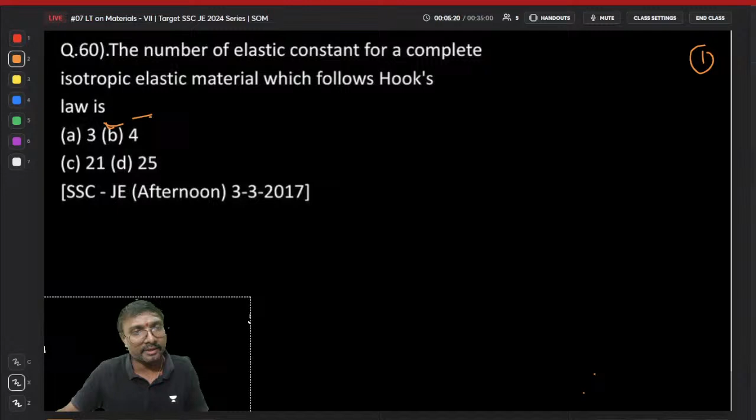Rubber we have selected, right? I have given the values also for this, na? Now this one, yeah, this one is also over. Number of elastic constants for a complete isotropic material, right? That fourth one we have done. Yes, this is also over, right? Now which one? 61, it is not over, na? So 61 is not over, right?

Got it? Arey yaar, this cursor is not moving easily. Why? I don't understand. It is like somebody hacked my system. It is not moving. Right, arey yaar, why? What happened to this?

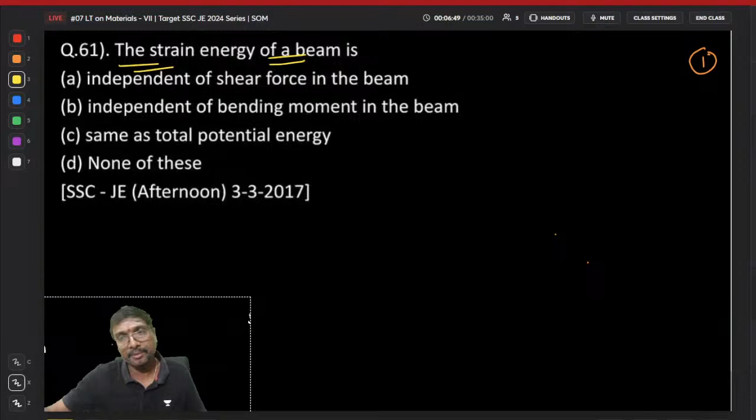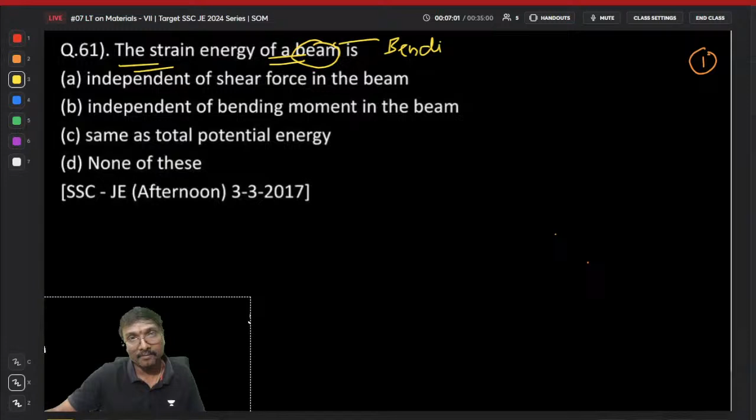The strain energy of a beam is, right? What is the strain energy of a beam? If you just observe, beam means it is a bending member, or it is which member? Tell me. Beam is nothing but mainly a bending member only, na? Beam is mainly a bending member, you can say, right?

Now tell me, is it depending upon the shear force or independent of the shear force? The strain energy for this bending member beam is given by integral of Mx square dx divided by which one? This EI, na? Mx square dx divided by EI, if you just read. Got it? Or 2EI or EI, which one it is? 2EI, na?

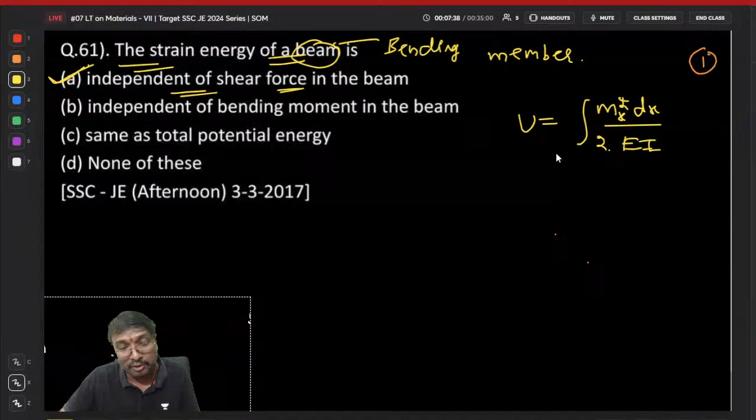That is your bending member. Bending member means bending moment should be considered, if you just observe, right? Now next one, 62nd question, if you just consider, right? What is it you can say? Select the answer for the 62nd question, everyone.

62nd question, somebody answer. Pulkit answered correctly.

Yeah. So here, what is that you can say? In a composite system subjected to a temperature rise, right? So what is the composite system? I will explain, don't worry, right? Did I leave anything without explanation? No need to ask separately, okay? In a composite system subjected to this temperature rise, right?

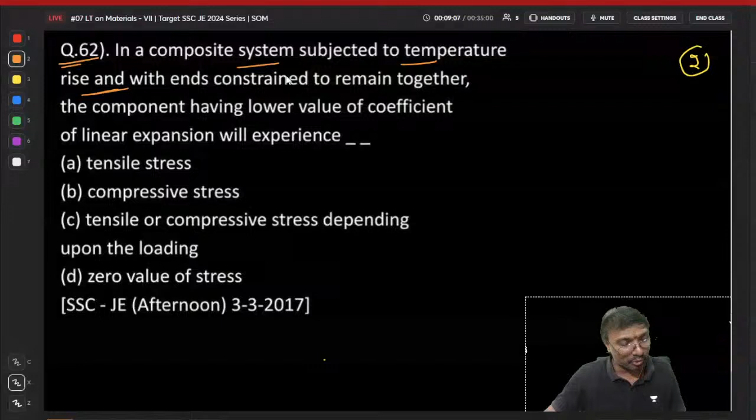Composite means only one is there, or two members are there in the composite section? Composite section means how many members will be there? More than one member will be there, then it is called your composite section, na? So these are your two sections, right? More than one member is there. You know? So now one is which one?

And with the ends constrained to remain together, right? Ends constrained means these ends are connected together, na? Ends are connected together. The component having the lower value of the coefficient of linear expansion will experience, right? So let us say this one is having a higher alpha. This one, let us say, is having lesser alpha.

Now what happens? Tell me if you just observe. Temperature rise is there, right? Whenever this temperature rise is there, subjected to temperature rise with ends constrained. You can take the bottom one, you can take the top one. It is not mentioned. One we are taking higher alpha, one we are taking lesser alpha, right?

You can take the upper material with lower alpha and the lower material with higher alpha. There is no issue, right? Just for example we have to take it, right? So that is why we are taking it. Now tell me,

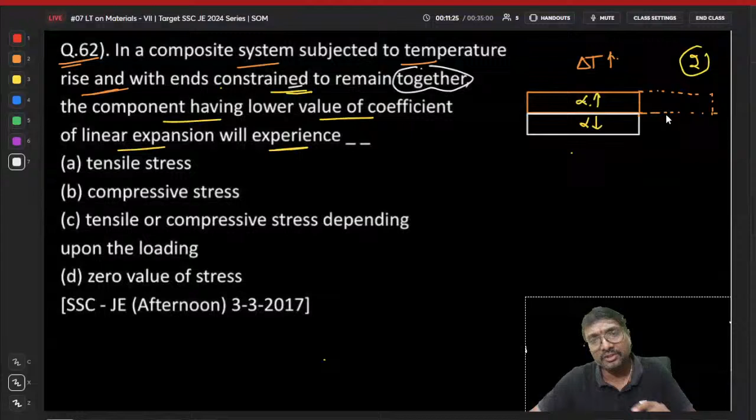It will be extending up to this point under free conditions. When delta T temperature increases, it will be expanding up to this point under free condition. Alpha is lesser means it can be expanding only up to this point because of this lesser alpha. So these are your free expansions, up to this point, is that clear?

These points are clear, everyone? These points are clear, right?

Now, but what happens? Both are acting together, na? Both are acting together, if you just observe, when both are acting together, they will be expanding to the same extent.

Strain compatibility, right? When both are together, what will happen? Will one be subjected to higher deformation and one to lesser deformation? That kind of condition will not happen. Together means strain compatibility will be there.

Together means what condition will be there? Together means it is your strain compatibility you are having. So whenever there is strain compatibility, both together will be expanding only up to a certain point.

So what is this one? This is your final expansion of these two. Is it clear now, every point? This is the final expansion of these two, all of you. Can you say this is the final expansion of these two?

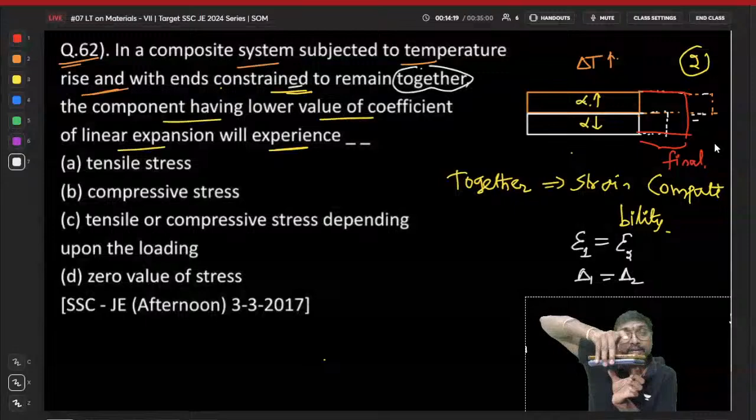So the higher alpha material is expanding more, the lesser alpha material is expanding less, right? But what is mentioned? Ends are constrained to remain together. They are held together. Remaining together means there is bonding, means composite behavior will compulsorily come, and this strain compatibility condition must be existing.

Whenever there is bonding, strain compatibility condition definitely comes into picture, isn't it? Got it?

So now both together will be expanding only up to this point, this red color one. Now tell me, it is expanding to which one? Yeah, they will try to behave like a single member. Yes, absolutely correct, right?

So now whenever they are expanding like this, the higher alpha material is expanding to a lesser value than the original. So that means it is under compression effect. It is under this compression effect. So the higher alpha material is under which stress, you can say? This is under compression effect, that is the compressive stress it will be having.

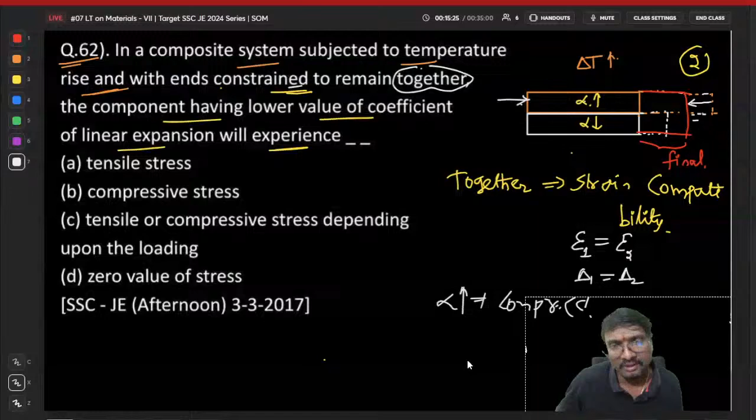Okay, yeah, it is getting stuck. I don't know what is the reason. Next, see my writing how it comes. Stuck, it is coming like that.

Now the lesser alpha material, what will happen to it? It is expanding to a value more than its capacity, more than its precondition. When will it happen? Because if it is under tension only, this will happen, that is under tension, right?

Understood now? So lesser alpha material is under tension, higher alpha material is under compression, right? So which one is the correct answer now? Lower coefficient of thermal expansion material will be having tensile stress, right?

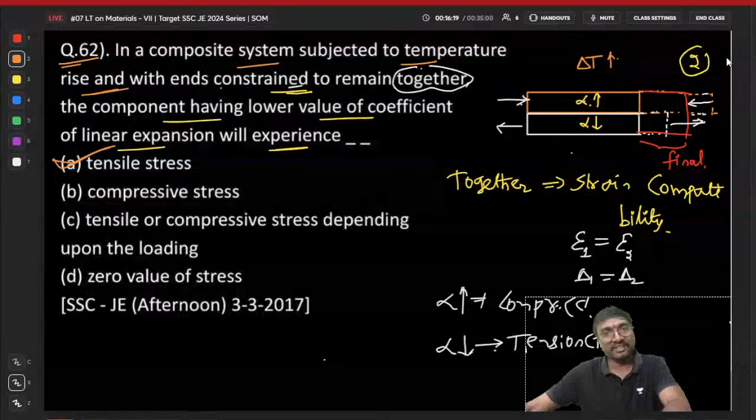Is that clear everyone? Shall we go on to the next? PC needs some rest. Okay, shall I go to the 63rd question?

Yeah, Aravind answered correctly. What about the others?

Right. Okay. So here we're just observing, right? What is that we have to go for? What is the question given? You can say.

Right, no poll, it is not started. Oh yeah, I thought poll is running already. Okay, one second, 30 seconds time only. I'll do it now, otherwise...

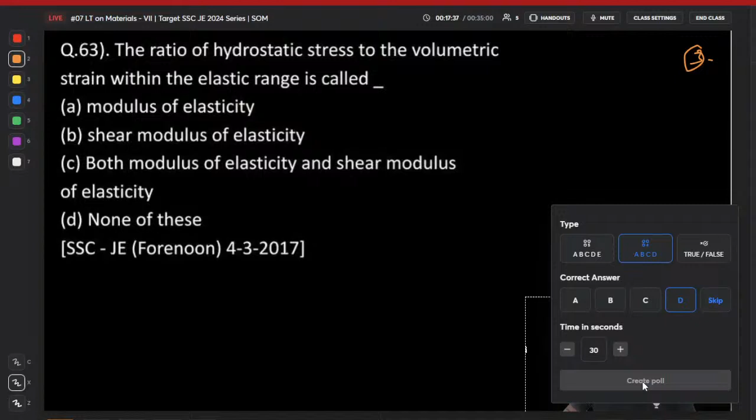Yeah, Aravind, correct. Pawan, Shruti, Pulkit answered correctly.

Right, so here, laptop keep it in AC room. AC is not there, okay, in our house. Right, we thought of taking now actually.

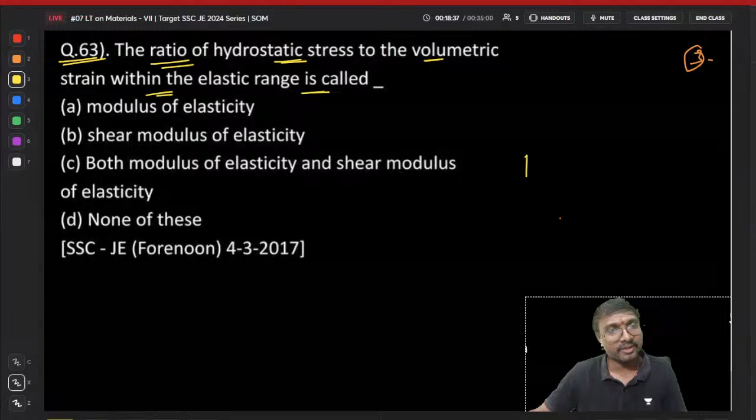The ratio of hydrostatic stress to the volumetric strain within the elastic range is called as, right? Hydrostatic stress rate - what is the hydrostatic stress? You can say that uniform hydrostatic stress means it is the same stress in every direction, divided by this volumetric strain, right? What is that?

That is your bulk modulus. It is not the elastic modulus, right? What is that elastic modulus? Normal stress to normal strain. Shear modulus is nothing but your shear stress by shear strain. Both elastic and shear modulus - is it so? No, nothing like that. It is not like that.

So which one is correct now? Bulk modulus is the correct one or not, everyone, right? Bulk modulus is the correct one, you can say just that. Bulk modulus only will be the correct one, you can say. Got it?

Right, one second, just some questions are left actually here. One sec.

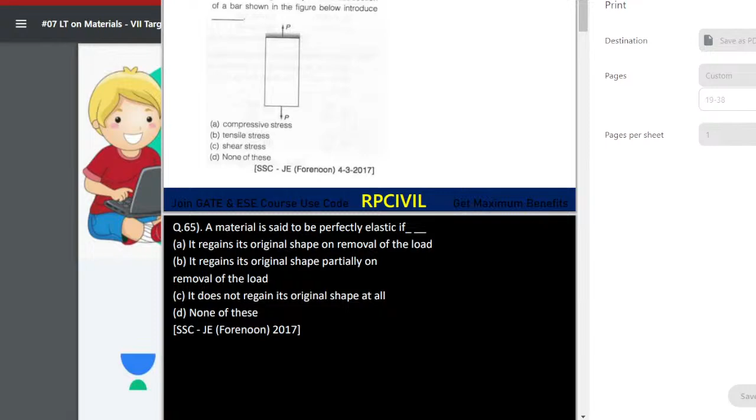Right, I'm just uploading these questions. Right, 63 questions are over. Now we'll be going from which one? This is 64th question onwards, right? 64th question onwards.

Yeah, you have seen that question. Very good. One sec.

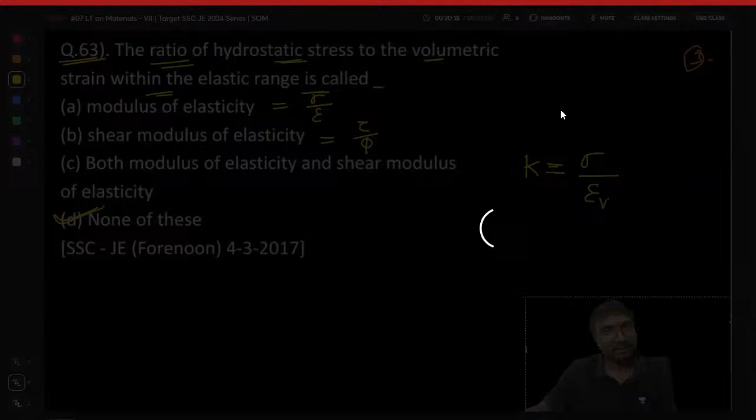This is 64th question, you can say. So shall I start the poll for the 64th question, right? Select the answer of you. 30 seconds time I am giving.

I told you now 90 questions are there. We are doing the 64th question, right? Just 1 or 2 classes, it will be over. Okay, first chapter gets over, right? Next we'll be starting the SFD BMD because that is the most important chapter afterwards now. Or principal stresses shall I go for?

First, what is that you can say? Simple stresses and strains, principal stresses and strains, and what is that you can say? Next one is deflections, SFD BMD, right? These 4 chapters are very most important topics for any examination's point of view.

You want me to take principal stresses and strains or SFD BMD, which one? Or my wish is to take principal stresses and strains.

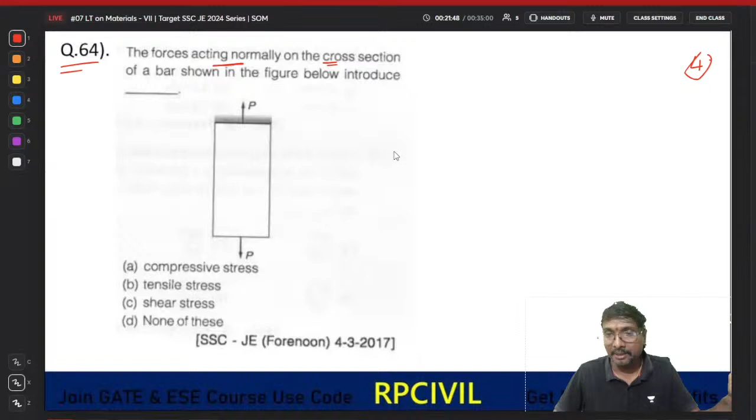Is not BMD especially we should know for getting some of the deflections, isn't it? Moment area method, right, the moment area theorem, right? Conjugate beam method, if you try to use now, SFD BMD we should have idea, right? For that purpose, after SFD BMD only we should go for these deflections, right? Before that we don't go. Okay, I'll go in my own way, don't worry.

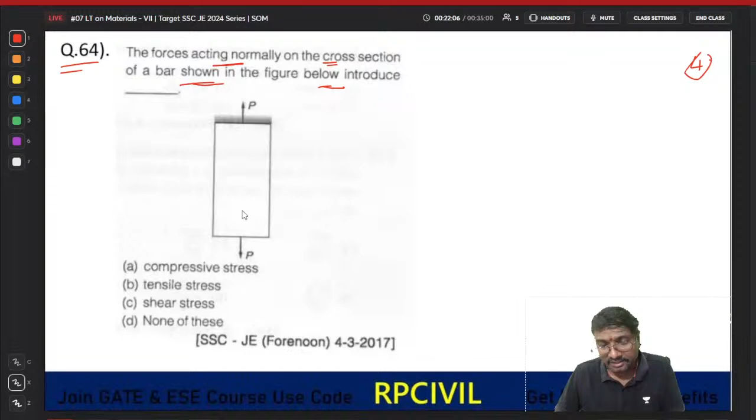Right, the forces acting normally on the cross section of a bar shown in the figure below introduces, right? What is it you can say? So external load is your tensile load, na? This is a tensile load, will be creating which one? This is a tensile stress only, na? Yes or no? Next, the 65th question, right?

Try to select the answer of you. 30 seconds time I am giving. External force is your tensile force, therefore the stresses comes to be which forces? If you just observe, those are your tensile forces only, isn't it?

Right? Pavan, Shruti, Pulkit answered correctly. So what is it you can say?

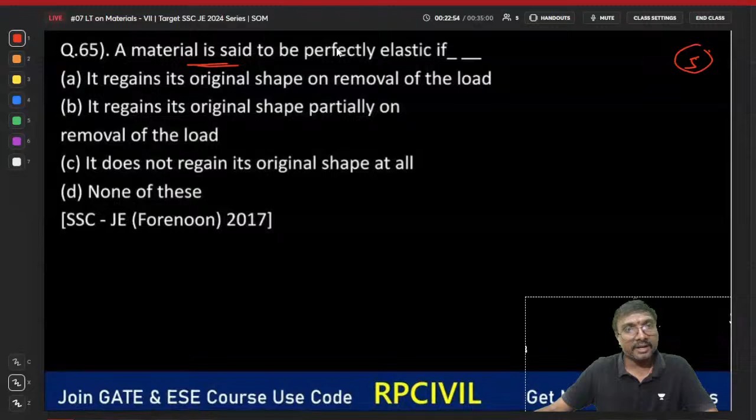A material is said to be perfectly elastic when it regains its original shape and size on the removal of the load. That is called perfectly elastic, isn't it?

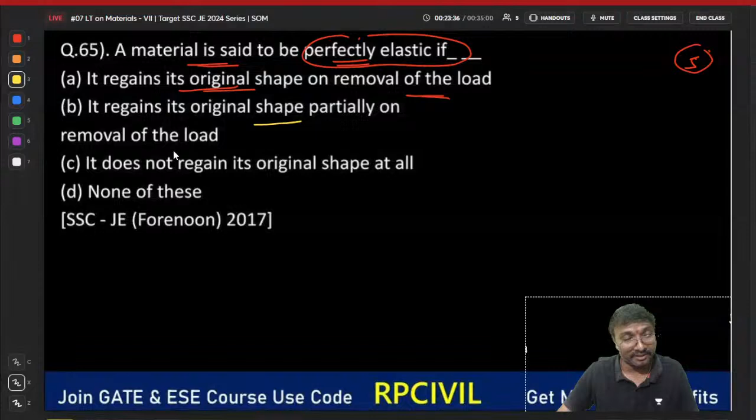It regains the original shape partially. When it regains it partially, can you call it perfectly elastic, or partially elastic? You call it partially elastic. Perfectly elastic you cannot call it, isn't it?

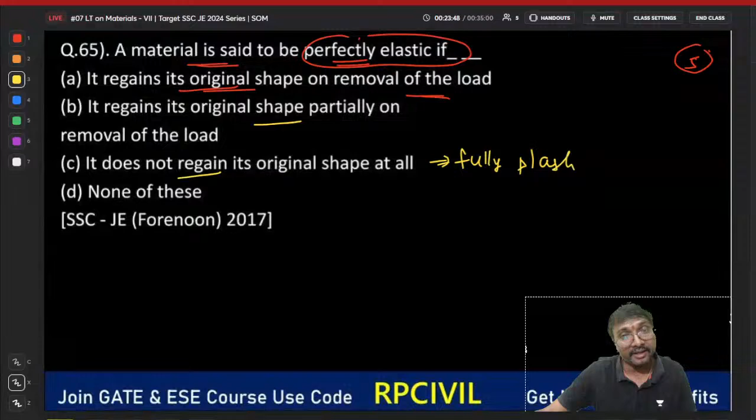It does not regain at all. So which one is this? This is fully plastic, right? Option C is fully plastic, it cannot regain at all. So perfectly elastic means the first option is the only correct answer, right?

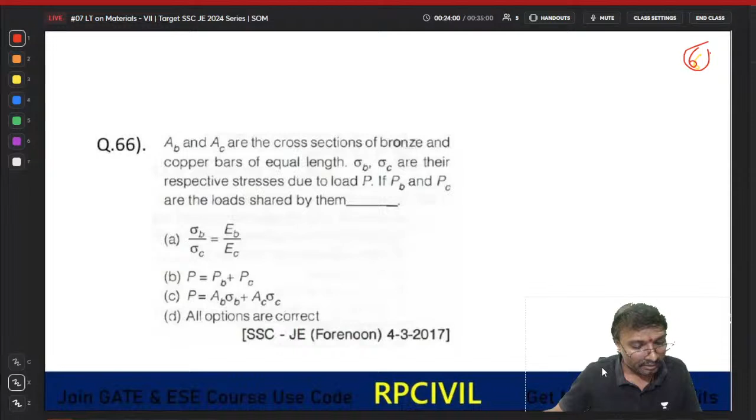So shall we move to the next one, the 66th question? Here, select your answer. I am giving 60 seconds time. Try to solve this, all of you now.

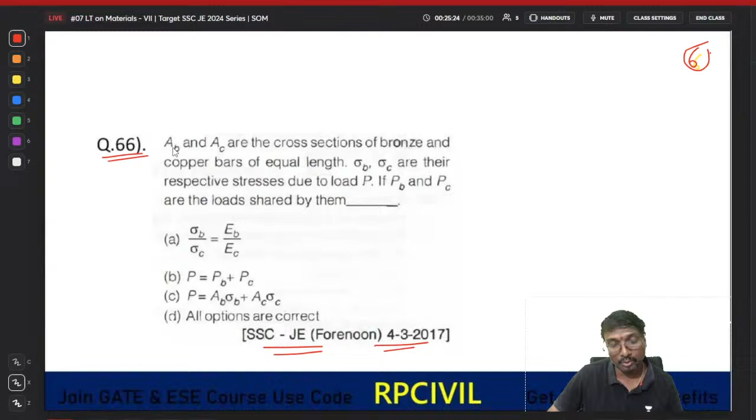AB and AC are the cross sections of bronze and copper bars having equal lengths. Tell me, are both having equal lengths or different lengths? Both are having equal lengths, right?

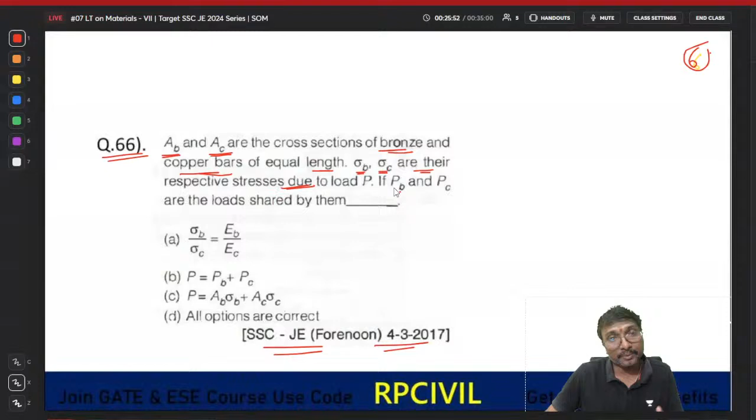Now sigma B and sigma C - what is it you can say? Sigma B and sigma C are their respective stresses due to load P applied on them. Individually, bronze has stress sigma B, copper has stress sigma C.

Now PB and PC are the loads shared by them. What is the relation between PB and PC? How can you get that relation if you just observe? Here both are having the same length.

So what can you say? Epsilon B will be equal to epsilon C, isn't it? This means the strain compatibility condition.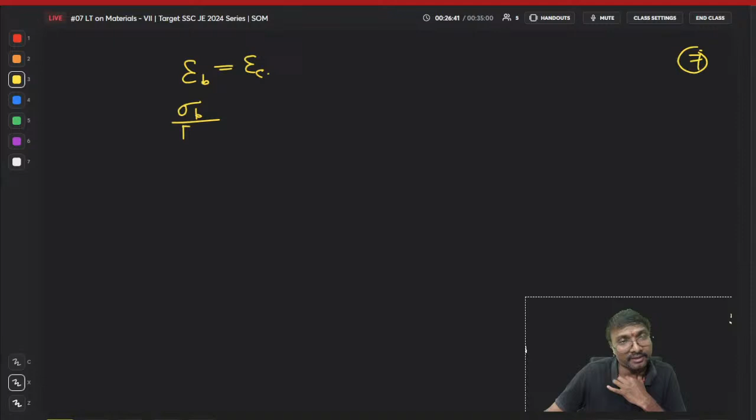And epsilon B is stress in the bronze divided by Young's modulus of bronze, equal to stress in the copper divided by Young's modulus of copper. Okay, like that we are having.

So this is a relation we should have, and what else? Sigma B by sigma C will be equal to Young's modulus of bronze divided by Young's modulus of copper. Can you take it like this?

Now what is the total load? Total load is shared by both - load taken by bronze plus load taken by copper. Now tell me which one is correct if you just consider.

The first one is correct, the second one is correct. So PB is nothing but AB into sigma B, this is correct, right? Which one is the correct answer now? All of the above is the correct answer.

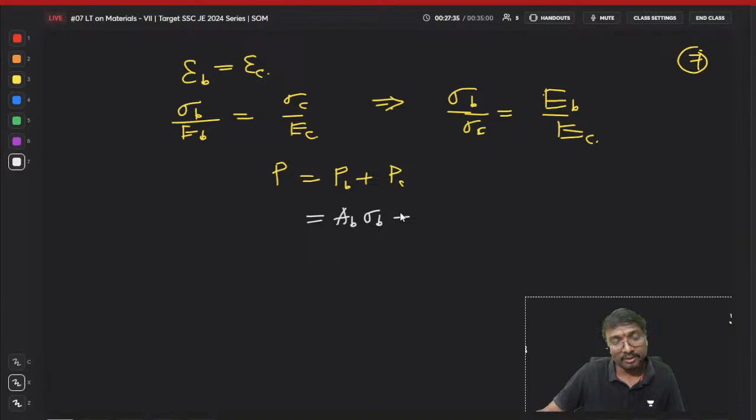So PB is area of cross section of bronze into stress in the bronze, plus PC, load taken by copper, is area of cross section of copper into stress taken by copper. Got it now, isn't it?

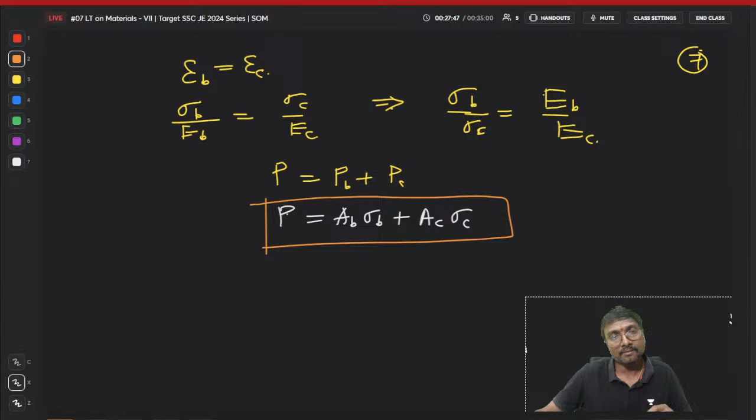Clear now, everyone? Shall I move on to the next? 67th question, shall we move on to?

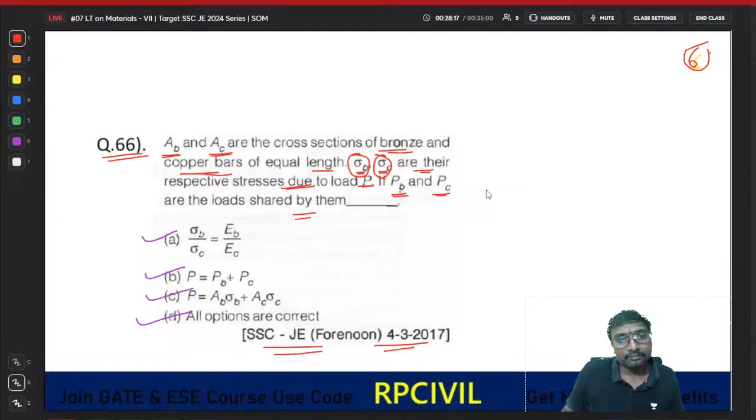Composite, it is mentioned, equal length are the respective sections, right? These are the loads shared by. So now, automatically, when a composite section is given, if no specific condition is mentioned, you have to consider they are following this composite behavior, right? Yes, no? Okay. They are following the composite behavior by default, we have to consider. Composite behavior is there means strain compatibility also must be there by default.

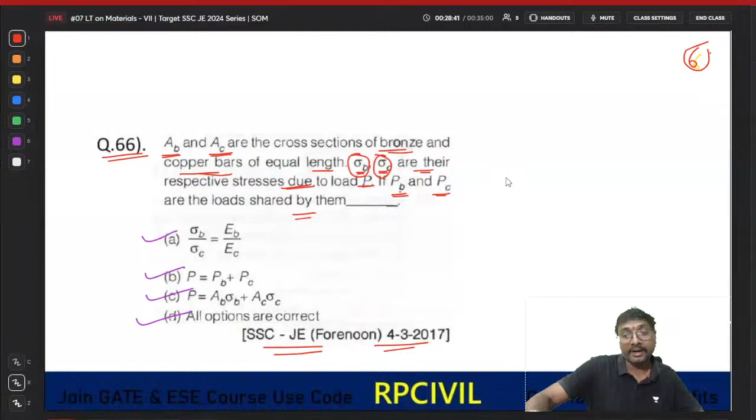If it is mentioned that they are behaving individually, then you don't consider that. Higher alpha material will be expanding more or contracting more. Lesser alpha material is expanding less or contracting less, right? That is what. Got it? 67th question, shall we go for? Select the answer, everyone.

Will get answered correctly. Arey yaar, more time I have given, extra time, unnecessary time. Okay, I'll end the poll. Anybody from YouTube? Nobody answering from YouTube?

The ratio of shear stress and shear strain of an elastic material. So what is that? Young's modulus is normal stress to normal strain. Rigidity modulus or which one? Rigidity modulus is C equal to N, or this is shear modulus, right? G equal to C equal to N equal to tau by phi.

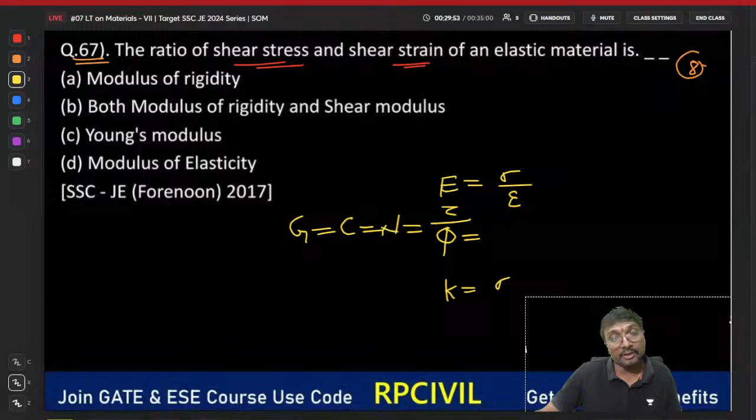And bulk modulus is equal to which one? This is normal stress by volumetric strain. So which one is correct? Both modulus of rigidity and shear modulus, right? We can call it with any name. Right. So shall we move to the next one, everyone?

So this 68th question, shall we go for it? So we'll start the poll. You observe A, B, C, D properly and select the answer. This is your C and this is your B. Don't take that 5 millimeter as B. Take that 5 millimeter as C. You observe and select the answer.

You are not listening. Who is that cute fellow? Not listening to me and answering one after another. I was telling that already. You observe B, C properly and select the answer. So you have to be careful. Don't be in a hurry always. Okay? Pulkit only answered correctly.

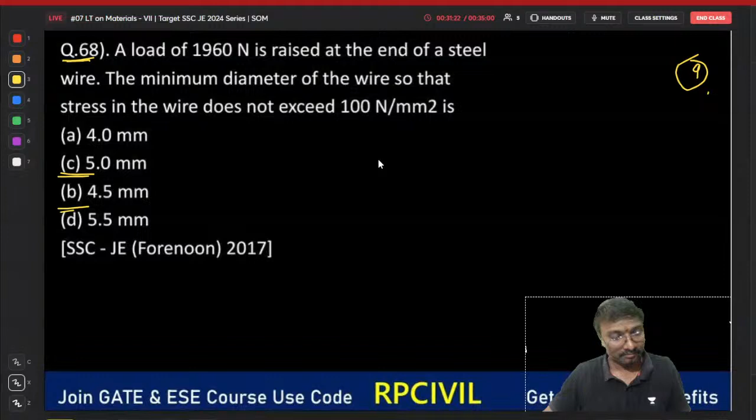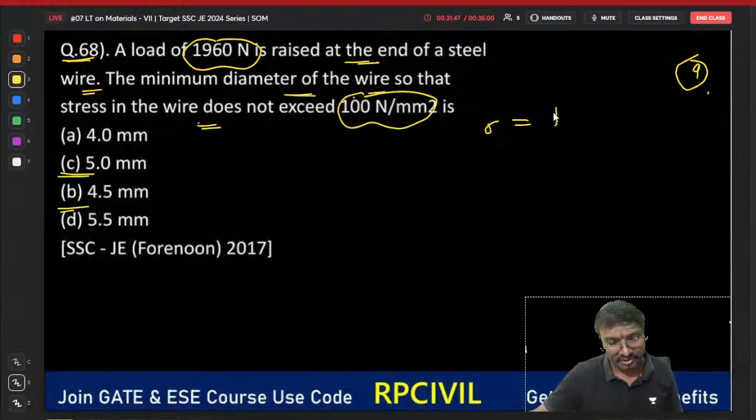Right. So a load of 1960 newtons is raised at the end of a steel wire. The minimum diameter of this wire, so that the stress in the wire does not exceed 100 newtons per millimeter square. So stress is nothing but load by area, right? Diameter is mentioned; you are asked to identify it. Diameter means which shape? Circular shape, so pi by 4 into d square.

So sigma is 100. 100 equal to P, 1960, divided by pi by 4 into d square. Now tell me how much the d value comes to be. d square is equal to 1960 by pi by 4 into 100. So what is the d value? How many millimeters?

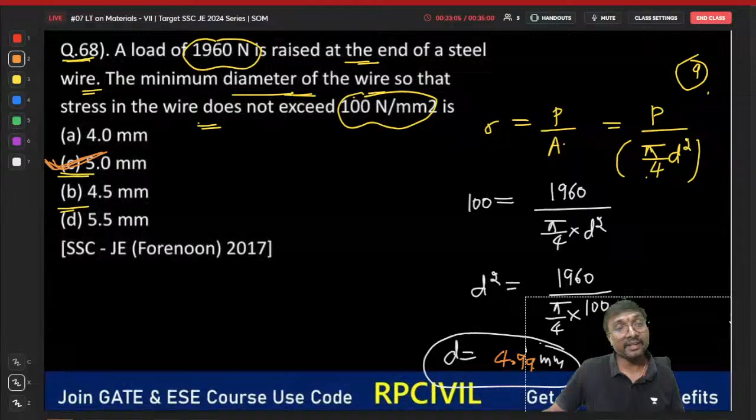D value comes to be how many millimeters, everyone? 4.5 or 4.99? Which one? Check it and tell me. 4.99. So 4.99 means we have to select C, that is 5 millimeter.